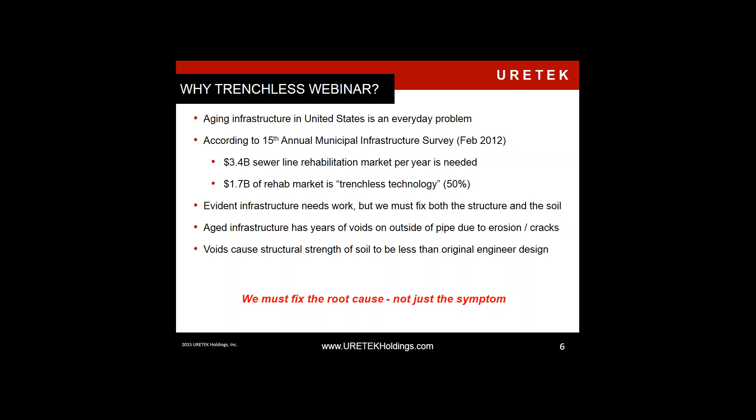So with our outside-inside series, we treat the outside of the pipe with URETEK, which is our chemical grout. On the outside, we fill the voids, displace unwanted water, and increase the bearing capacity of the soil using the chemical grout. On the inside, we are an applicator for Centripipe, a centrifugally cast concrete mortar. So you're able to get a like-new solution for your customer, or if you're the municipality, for your own assets.

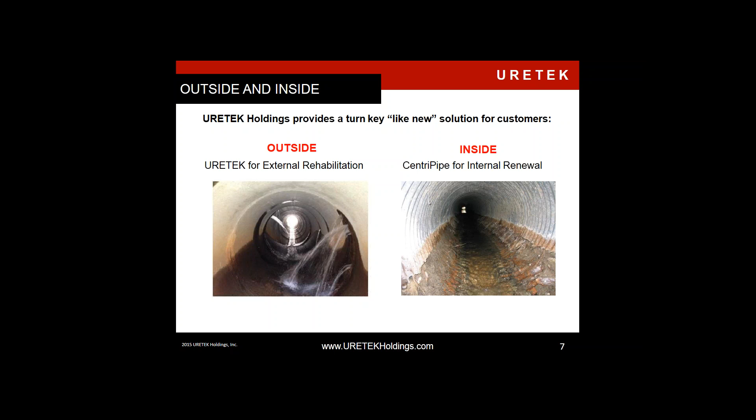And now you no longer have your original bearing capacity. So even if you just reline this only, you have an inferior soil envelope for the structure.

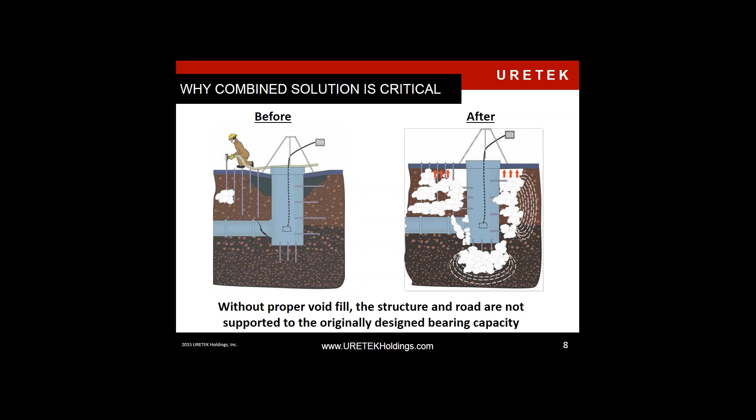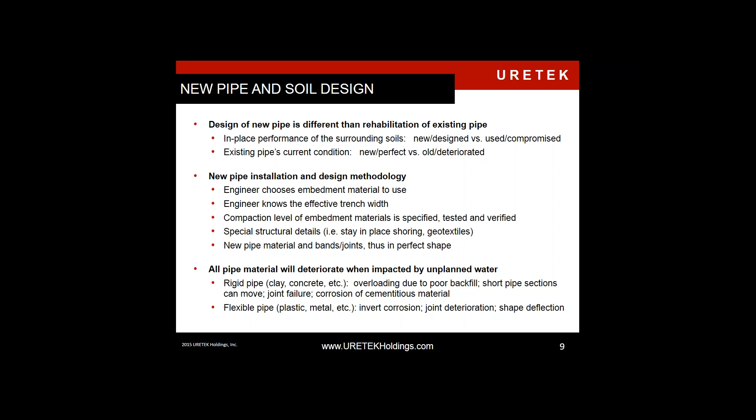Which takes us to the difference between new design and rehabilitation design. In new design, everything is perfect. You know what type of pipe you're going to be using. It's in perfect condition, the joints work, the gasket or the bell and spigot, everything lining up perfectly. From the surrounding soils, you can specify whichever type of soil you want. It is then compacted to your desired compaction level, 90% or 95%, whatever compaction level you're desiring, and all that goes into play. But what happens is there's unplanned water that starts to migrate through the system, whether it's due to poor backfill, or maybe some of the short pipe sections of RCP have started to adjust and move. You also have joint failure, no matter what type of pipe that you have.

So then that brings us to rehabilitation pipe and soil design. A lot of us are familiar with CANDE, the Culvert Analysis and Design Program, which states that you need to take into account not only the structure, but the surrounding soil envelope. They are codependent composite structures where both rely on each other. Even RCP pipe, when it is in fact designed to take a lot of the load, if the surrounding envelope is not in good shape, it will start to settle and become misaligned.

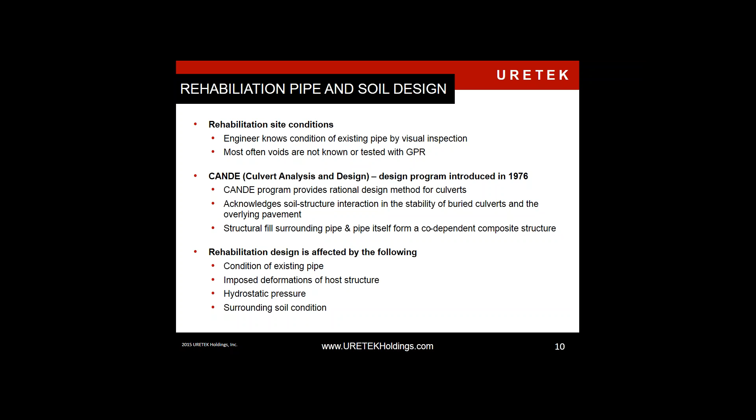So what we have found, and really what is critical to the success of rehabilitation, is to not only analyze the existing pipe, not only take into account any hydrostatic pressure, but really that surrounding soil. What is the condition? Are there voids? Are there issues that we need to address?

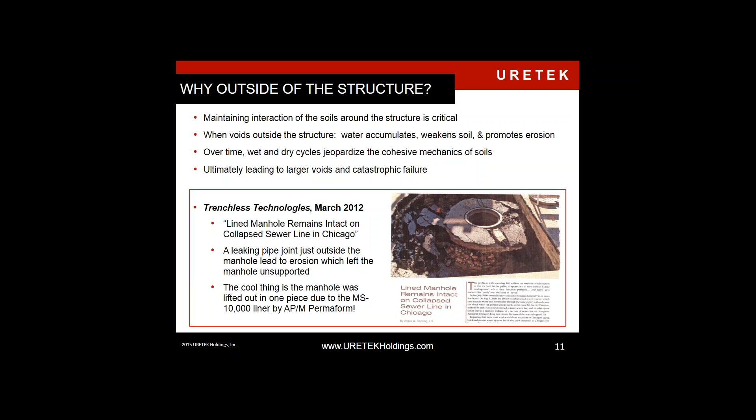This is a perfect case study of how critical the outside of the structure can be. March 2012, Trenchless Technologies had an article for a massive manhole project that took place in Chicago. You see this picture on the right. This manhole was lined with Permaform, which is one of the products that we are also an applicator for to treat manholes. But you can tell by this picture, the soil surrounding the manhole failed. That old brick manhole is standing due to that liner. So with this project, it was all about just doing reline for the structures, and the outside was neglected.

So we'll go through a couple of quick slides here of how URETEK can help with the outside, as well as Centripipe on the inside. But really the whole purpose of today's webinar is to educate you on how we detect our voids.

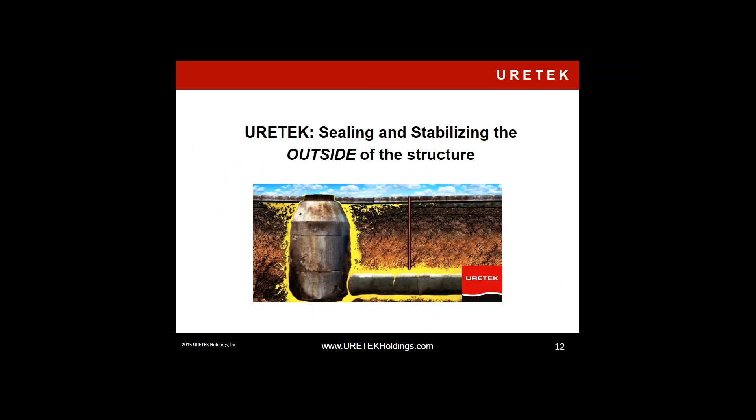So for the outside of the structure, URETEK Holdings, we utilize a chemical grout. Our chemical grout is very lightweight, but yet high strength. In the commercial industry, we use it to lift buildings, to lift footings, to improve bearing capacity. So very high strength to low weight.

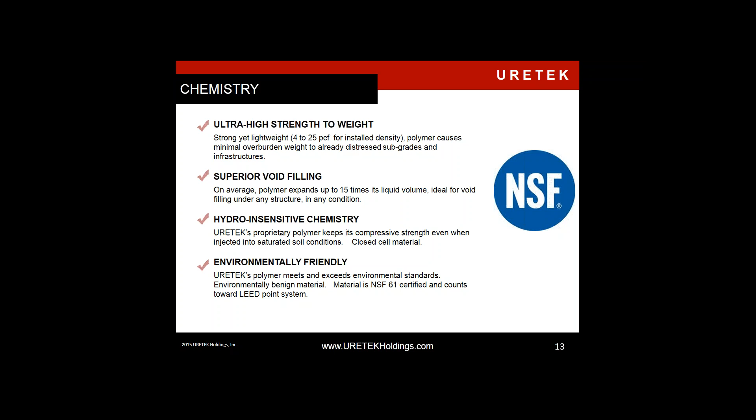One of these case studies that I always like to share is this one in Florida, where the voids around the pipe had become so bad that we needed to treat it with chemical grout. But this is a natural spring for manatee migration. So that NSF 61 rating, and that sensitivity being in blue streams for the Corps of Engineers, or being in manatee migration, comes into play.

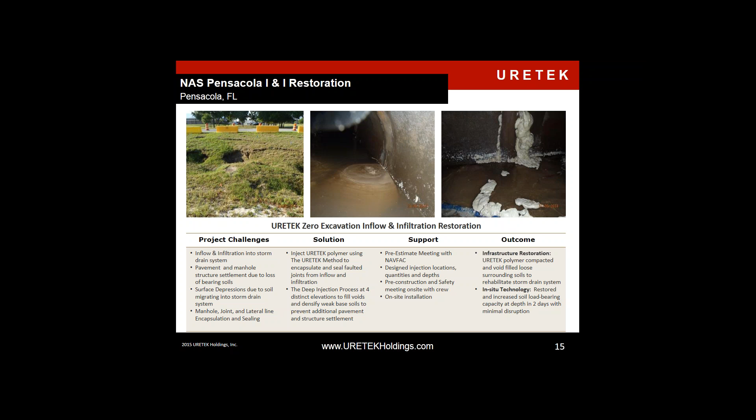The whole purpose of treating the outside of the pipe is to make sure you don't have catastrophic events take place, and then taking care of your pipe. This picture on the left shows sinkholes at the surface that were caused by I&I, inflow and infiltration. And the picture on the right shows basically what we call outcroppings, where we inject the chemical grout on the outside of the pipe. It starts to flow in, filling that joint, giving a positive seal. We then will clean up and dispose of those outcroppings.

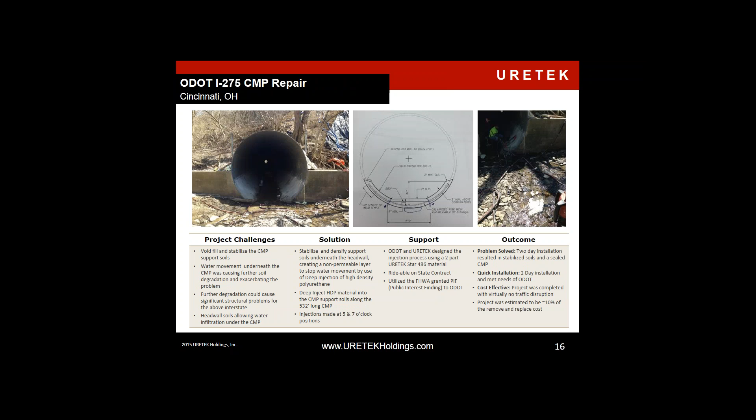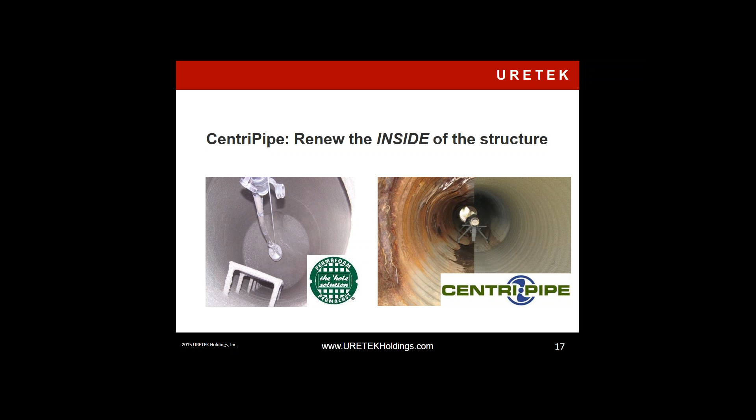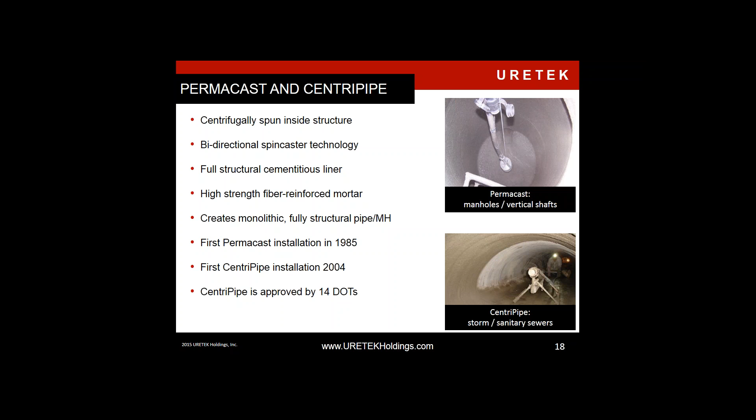Another way we treat the pipe from the inside is through CentriPipe. Permacast is for manholes, and Centripipe is the same technology, just turned horizontally to take care of the horizontal lines. This can be used in sanitary and storm sewer, and is currently approved by 14 different DOTs across the country, which is really just a function of filling out the paperwork and applying for DOT approvals.

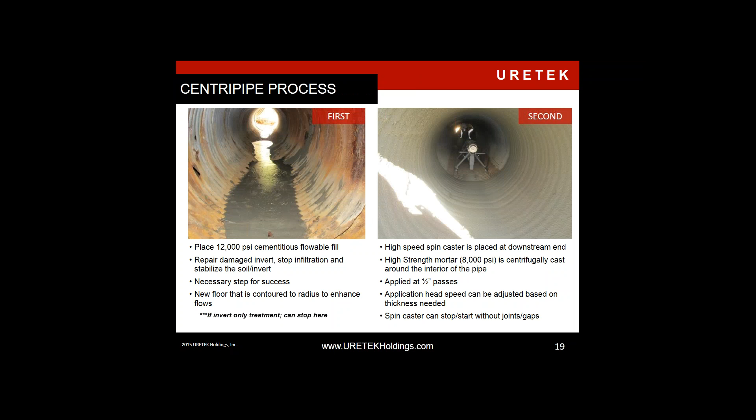Here you can see a picture on the left where that invert is deteriorated, so we'll pour 12,000 psi flowable fill to give a level surface and fill those voids. On the inside, we then spin a high-strength mortar of 8,000 psi to the desired thickness, determined based on the criteria of the site.

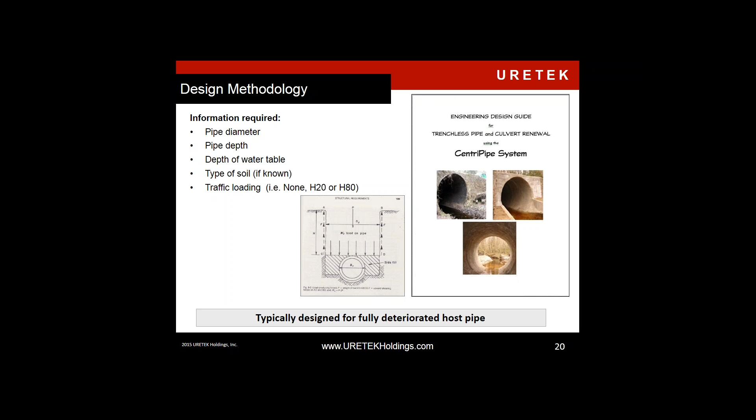What are the loads it will see? What's the depth? Where is the water table? The CentriPipe thickness is designed to stand alone. It's not dependent on the host pipe. That host pipe is really just considered to be a form for the mortar to apply to.

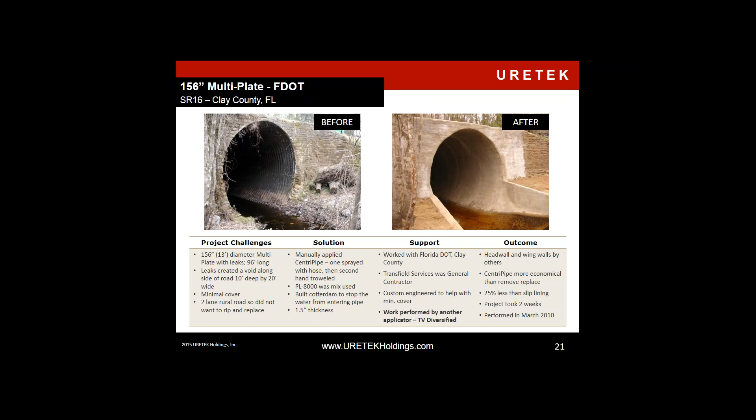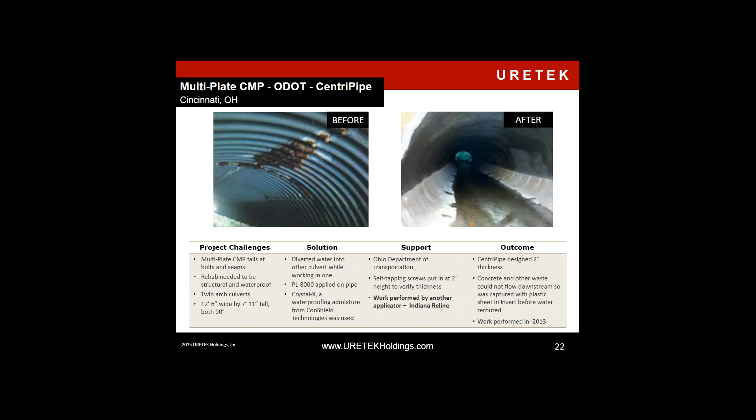Here's a couple quick project profiles. This was a job that was hand-applied using the same mortar mix. And here's another application with a DOT to help take an older pipe that was buried deep, and now you can treat the inside.

To recap, URETEK and CentriPipe fix the void in pipe after the problem has occurred. We can use the chemical grout on the outside, the CentriPipe on the inside. But what we're trying to shift is the asset management with municipalities and engineering firms to have a maintenance schedule before a problem occurs, before that sinkhole on the surface happens, before that manhole settles in the roadway, so cities can plan financially for their assets.

That's why we partnered with Inversa, because they have a first-in-class technology to detect voids on the outside of the pipe, as opposed to traditional acoustic or visual methods. They've got basically a CAT scan system that is very useful in helping. These three solutions together are definitely going to reduce life cycle cost.

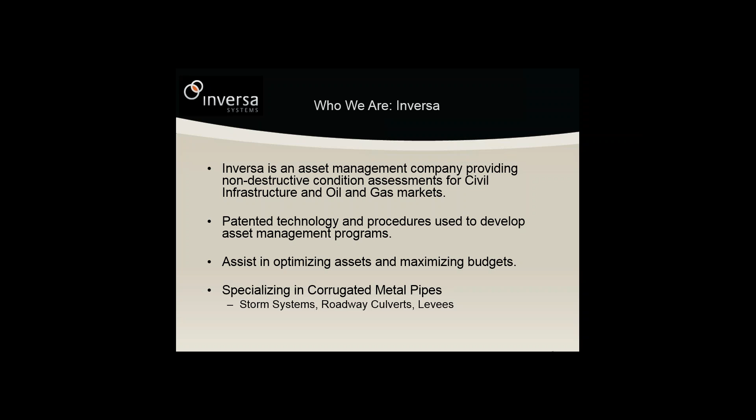Ultimately, our objective is to extend the service life of assets and maximize budgets on behalf of the asset owner, and we try to do that through a proactive asset integrity management system. We have patented technologies and procedures that help shape our asset management programs, and we specialize in corrugated metal pipe. We do have the ability for some other assets, but our specialty is really around corrugated metal pipes, storm systems, roadways, roadway culverts, and levee systems.

In terms of our organization, we have a very solid team of multi-disciplined engineers and technicians. We can support existing markets with that, but we also have a constant R&D cycle where we're trying to take this technology into developing new applications and new opportunities. We're capable of providing value-added engineering, with a diverse mixture of folks on the engineering side as well as technicians, and many times we collaborate with the engineer of record or local engineering consultants to help solve problems for the assets on behalf of the asset owner.

In terms of some of the projects we've done, we're extremely proud of the diverse mixture of clients and projects we've had the opportunity to work on, and those have really validated the value of Inversa. Now, as Corey said, we're exploring partnership opportunities to try and really penetrate the market and grow the awareness of our technology. So we're happy to be working closely with URETEK to accomplish that.

So you see a broad mixture of clients from the U.S. Army Corps of Engineers, large municipalities, small municipalities, state DOTs, private land owners have used it, as well as flood management projects. So as you can tell, we've really done a very broad and diverse mixture of projects throughout North America.

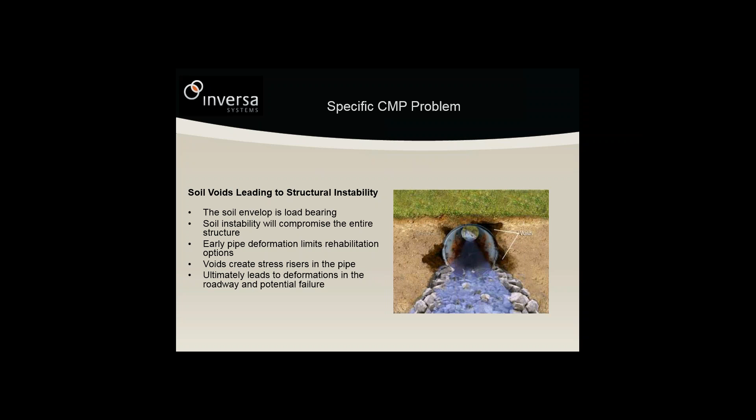One of the things we know is that more and more clients are looking to a trenchless solution to avoid disruption of infrastructure or roadway service or other problems often faced by the asset owner. So the question becomes: if we're just looking at the interior of the pipe without addressing the soil structure, are we really getting our money's worth, and are we getting the maximum potential service life extension from these assets? That's what Inversa steps in to deal with.

Current inspection methods for these types of assets are typically visual and occasionally acoustic or knock testing. These are both good screening tools. Inversa uses them, but with visual inspection, what you can tell are visual cues like corrosion, joint failure, misalignment, deformation, things like that, that can be easily documented. But you can't go beyond what you can see.

Some people do acoustic testing, or knock testing, which is banging on the pipe to try to identify regions of the pipe wall which sound different from the rest. This is a good screening tool, but what we know from years of experience is that it's subjective and subject to a lot of false positives. Very, very small anomalies can make a pipe wall sound hollow. So although it's a good screening tool, neither visual nor acoustic testing are conclusive as far as structural integrity in flexible conduits are concerned.

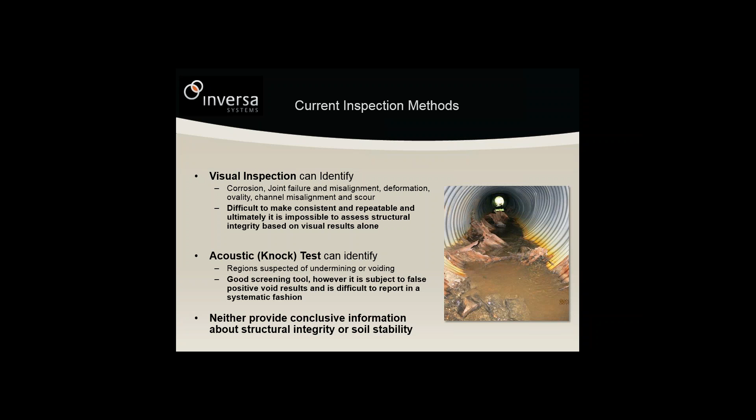Inversa has developed several technologies. Our lead technology is our Insight system, which is the first CAT scan for infrastructure. Many people are familiar with a CAT scan in a hospital environment, which, if you can imagine, is a large donut with a human body slid into the hole.

Inside that donut is a gantry, and on one side is a radiation source, with a detector directly opposing it. The radiation beam is shot through the human, and the gantry rotates around to create a relative map of density and a cross-section view. Inversa's innovation was being able to do this from one side, so we're no longer limited by the size of the hole in the donut for the objects we can examine. This is the first time CT scan technology has been taken out into an industrial environment.

What you can see there is the scanner gantried against a piece of pipe, and you can see the image. The dark wavy line at the bottom is, of course, the steel corrugated pipe wall, and behind that is a void area, and further into the image is the surrounding backing material.

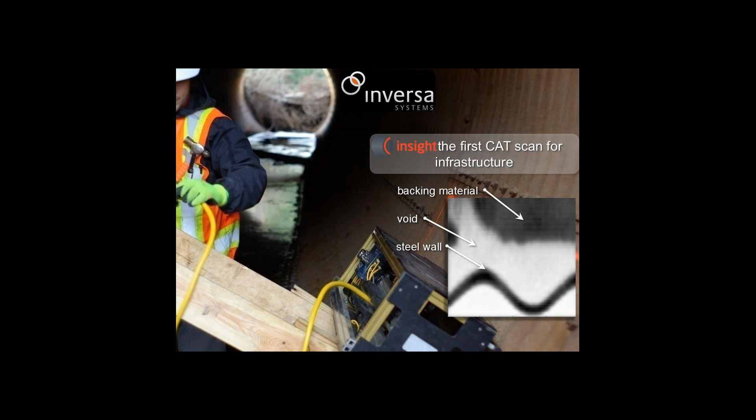Inversa's innovation for the application of this type of tool is a three-part condition assessment. What we try to do is look at best practices in the industry when it came to our visual inspection, and we developed a very robust, highly repeatable visual inspection protocol. For us, it is software driven, so the idea is ultimately we can have a very consistent rating between various inspectors in various conditions.

Ultimately, what we feel is that a well-done, highly repeatable visual inspection is an excellent piece of information. When done consistently and in a repeatable fashion, even that information can be compared to subsequent inspections, and you can begin to trend deterioration of an asset.

We went a little further and built a very robust protocol around acoustic inspection, where we test almost the entire interior of a pipe for acoustic anomalies. What we know from our experience with acoustic testing is that when we bang on a pipe and it sounds solid, about 99.6% of the time it is. When it doesn't sound solid, all we can say is it's different from the rest of the pipe, and we don't know what's going on there.

So what we do then is we locate these areas, suspect regions or anomalous areas, and we create a pipe map, so they can be located. These acoustic anomalies, if they're large enough and in consistent patterns, depending on the risk threshold of the asset owner, they will be selected for CT imaging.

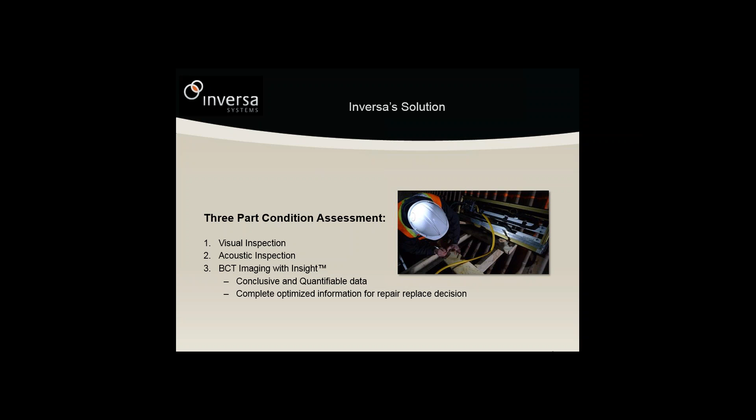So what we do is, like I said, Inversa's approach to this is to do a visual assessment, and it's a software-driven approach. The idea is that we very typically begin with the road surface, guardrail, embankment, head walls if they're there.

Then we look at stream alignment, scour. Then we go down the pipe barrel and we look for alignment issues, failing joints, corrosion, tipped or missing bolts, through wall corrosion, invert deterioration, and other things that can be assessed visually. These are all force ranked in a 1 to 5 system.

With that, we can begin to, a pipe that looks good can be tabulated. A report can be created based on the visual assessment, and if there is no need to further inspect, that can be fine, because we can do a large amount of pipes for an asset owner visually.

Then if there is reason or suspect reason, we very typically do an acoustic assessment of the entire inside of the pipe. With that, we then create a next phase of reporting where we create a pipe wall map. We look at the location and size of these anomalies, and if they are of concern, then they can be further investigated.

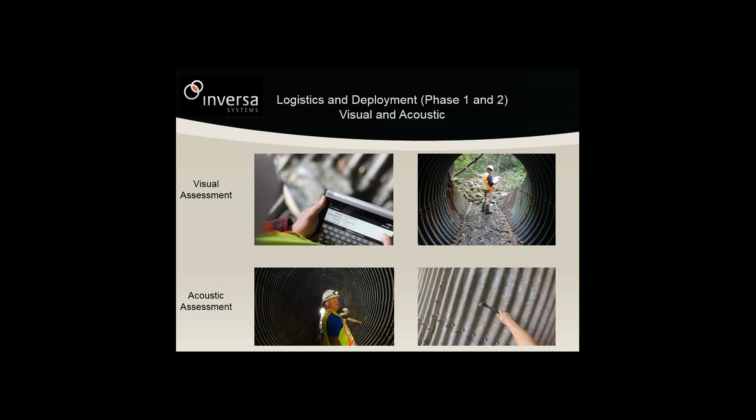Finally, we end up with the deployment of the CT imaging system, the Insight system. When we have acoustic anomalies that have been located and are in suspect regions or are of concern to the asset owner, they will be imaged.

Then the radiation source is deployed into the scanner, and the scanner is operated from a laptop remotely. So while the scanner is operating, we are not in the pipe with it. We're outside the pipe using a laptop to control it, and there is an image created in real time as the scanner is operating. Very typically for culverts, it takes about 8 minutes to create an image, and the image is very typically 10 inches wide and 10 to 12 inches deep.

As I said, when we begin to pull all this data together, one of the things our software does is it creates a map of the pipe wall, a representation of the pipe wall which has dimensional information. As you can see, there are small dots on it typically labeled V and a number for visual anomalies or visual cues. Then there are large dark squares, which are acoustic anomalies. And if there was a BCT image taken, it will be within the acoustic anomaly, so you see the red dots marked BCT where the images were taken.

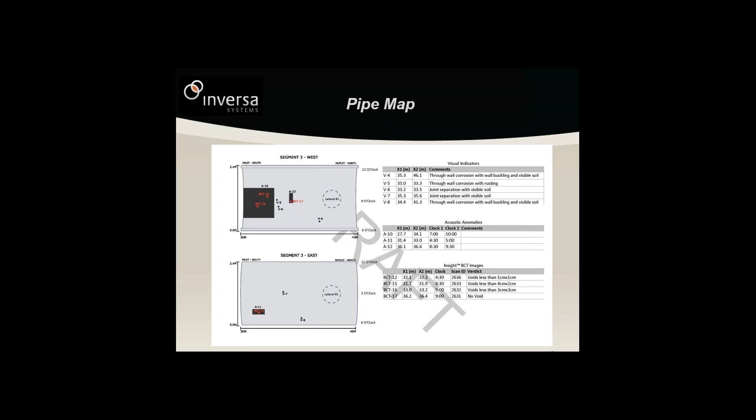So a lot of information can be gathered from the pipe map.

Very often when we're dealing, especially in roadway culverts, it's more difficult to do with stormwater systems. We provide a pipe profile plan, which gives you the burial depth, the geometry of the embankment. If possible, we survey inside the pipe to give you both vertical and horizontal alignment, and show any inconsistencies like sagging in the pipe. So this also is another piece of information that can be very valuable to the owner in assessing what needs to be done with a project.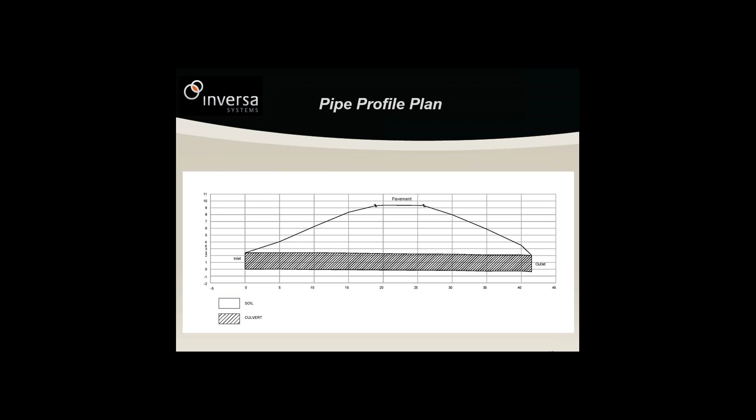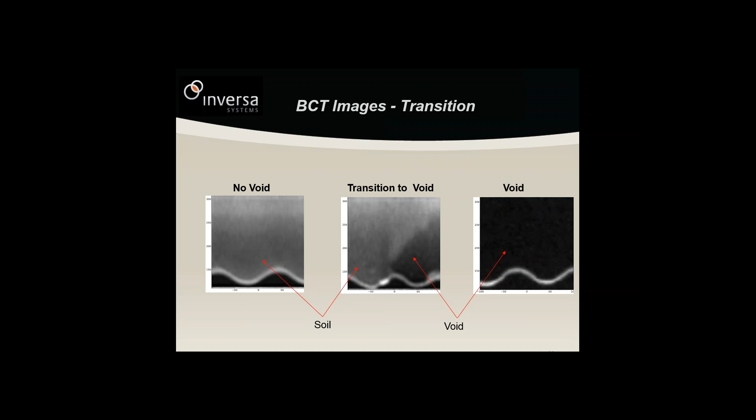One of the things we often say, and it's something we discovered over time ourselves by dealing with some of the engineers we deal with, is that the geometry of the void is often very telling as well. With a little bit of experience, we've realized that soft, sandy type soils tend to fail in a very straight shear wall behind the pipe when there's a void present.

And in fact, there was a smaller diameter, 24-inch I think, concrete pipe that had a failed joint. The water was running through that failed joint, flowing down through a little bit of a weak spot in the soil, hitting the culvert pipe, and ultimately causing a void behind it. This is the start of that void.

That void turned out to be many meters long and many meters high, so it was a very substantial segment of the wall of that pipe that was totally unsupported and under 6 lanes of traffic with about 20 feet of cover.

That pipe has since been rehabilitated. The annular space was grouted. The pipe itself was in pretty good shape. We understand from the owner that it was a $7 to $10 million excavation, but it was easily accomplished in a very short period of time. I think the contract was let for about $900,000.

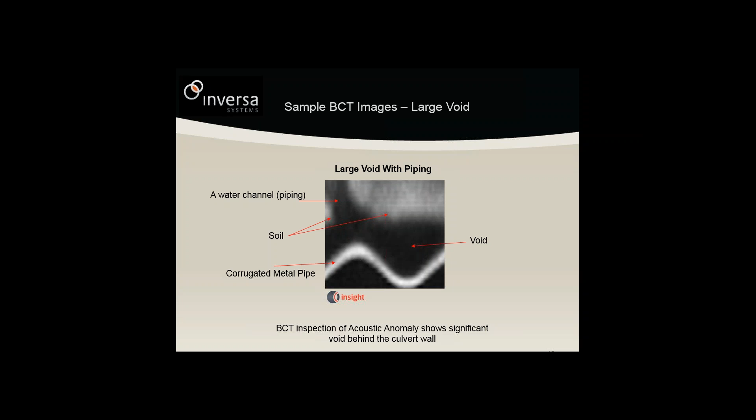So what we can say is Inversa System—basically what our goal is to conduct conclusive structural analysis of assets and prioritize critical assets. In other words, begin working with the asset owner to develop a good management strategy.

Very often we'll look at large numbers of pipes in visual and acoustic testing only. Then we will sit down, consult with the asset owner and say, of these assets we looked at, here are the few that are of highest concern. How much budget do you have to deal with it? Because often in the real world there are very, very hard budget limits. And they'll say, well, we have enough to deal with 3 pipes out of the 10 you looked at. So which are the worst 3? That's what we mean by prioritizing critical assets.

In other words, looking at the 3 at highest risk and allowing the owner to develop a rehabilitation program that addresses the assets they can afford to deal with at this time. A good visual and acoustic program can allow you to start to detail baseline information on these assets. You can begin to compare subsequent inspections if they're done in a highly repeatable, robust fashion. Then you're beginning to look at monitoring these assets and even trending the deterioration over time so that you know when an intervention is best done. And of course, when this is done well, this increases safety to the asset owner, safety to the users of the utility if there's a road above it or any other infrastructure.

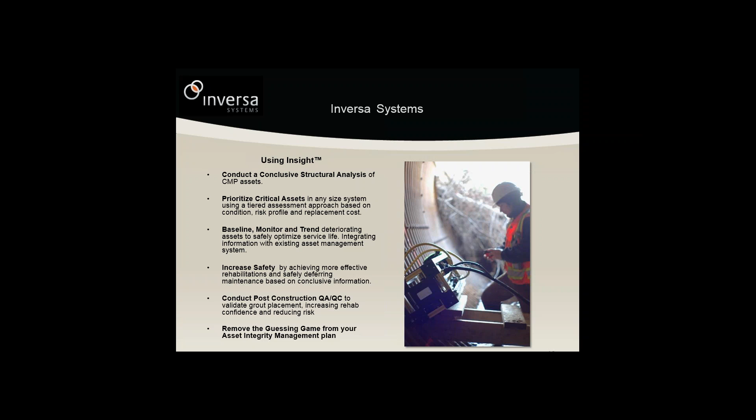Here I'll go through a couple of brief case studies. This is a recent one in Quebec, Canada, where we were dealing with a large diameter length of corrugated metal pipe that was a shared asset. In other words, part of the pipe was under municipal assets, the other part was under a provincial highway, a 4-lane arterial highway into Quebec City.

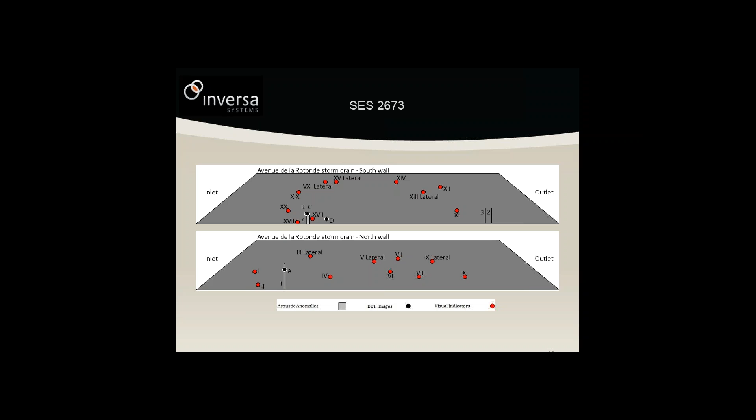This is an older version of our pipe representation, but if you look on it, you can see where there were visual anomalies, where there are small squares, where there were acoustic anomalies down in the haunches of the pipe, and then ultimately the black dots where there were BCT images taken of it. So we began to look at this. The concern was there was some severe deformation of the pipe, but it was highly localized. In other words, of the 180 meters of this pipe, there was really only about 4 meters that were really of key concern structurally. So we did a robust test.

We did visual acoustic testing completely, and we did BCT imaging where it was needed. What we did is we were able to locate 4 acoustic anomalies, 2 of which I believe were void areas, which were easily remediated, and we were able to help the owner develop a program to rehabilitate this pipe, which included some chemical grout applications in key locations in order to stabilize the soil around the pipe, 1 structural repair—which in this case included a tunnel plate type structure inside the pipe—and then a corrosion-resistant coating.

With all of these things handled, the client went from dealing with about a $5 million project down to dealing with a $500,000 project that would address only the parts of the pipe that were failing, and really deal with only the segments of soil supporting the pipe that needed to be stabilized. And then again, add a corrosion coating, which allows the useful service life of this asset to be extended greatly, and also a structural repair in 1 very specific location to deal with that type of failure mode.

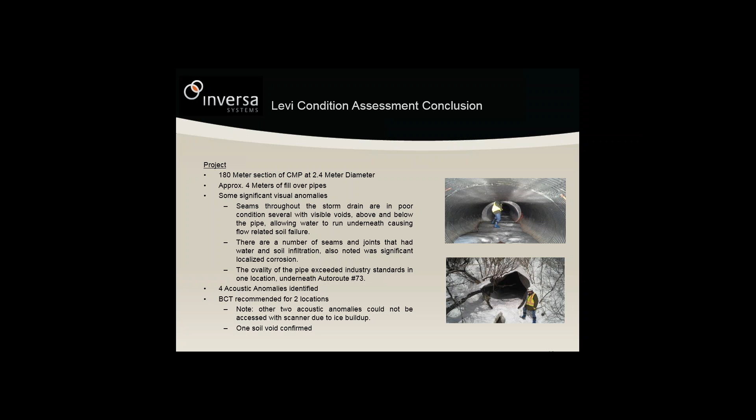Like I said, we developed on the outfall part of this pipe from 156 meters to 180 meters. It was on a very severe downslope.

That segment of the pipe actually wasn't able to be rehabilitated, but what we were able to do with the client, since the outfall was in such an advanced state of disrepair, is we were able to make recommendations on a monitoring program. In other words, we were able to say, here's the features you need to measure. You need to measure them every 3 months. Here's your survey measurements you need to take, the location of the pipe. If it shifts from that, then this is a very high concern.

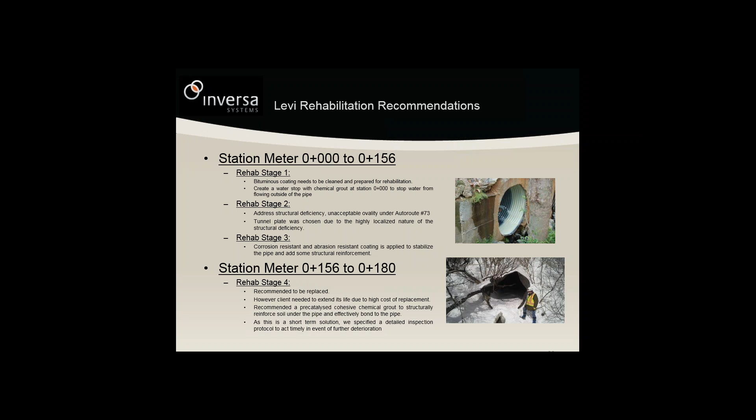So not only did we help the client locate the problem and point them in the direction to rehabilitate it, fixing the part of the pipe that can be easily and safely fixed to extend service life, but even on the segments of pipe, the outfall in this case, that weren't easily fixed, we were able to recommend a monitoring strategy so that they'll know exactly when they do have to intervene.

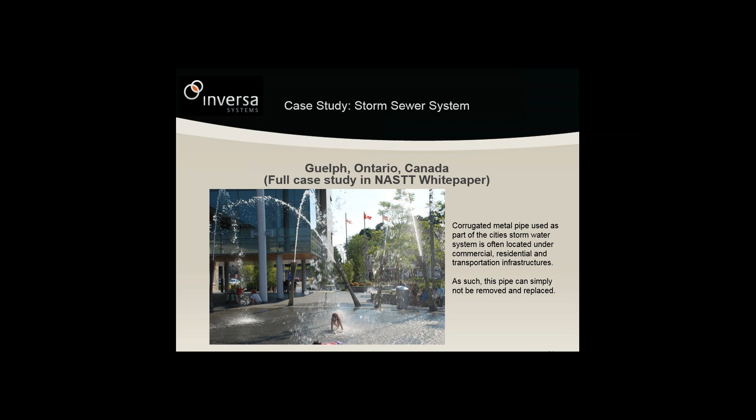Another case study is the City of Guelph in Ontario, Canada, where we dealt with a large stormwater project. Some of this pipe was under municipal infrastructure, in dense residential neighborhoods. Some of it was shared assets on a provincial arterial highway into the city. We looked at 17 segments of pipe in this project, and of those, I believe there were 4 segments that were of concern.

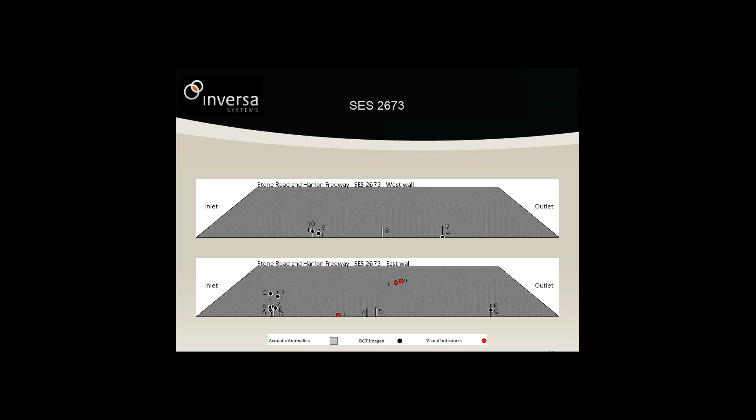So what we were able to do again is go into a visual and acoustic inspection, locate the areas of high concern. Acoustic anomalies were mapped and quantified, and ultimately BCT scanning was done in order to ensure that the voids that weren't supporting the pipe were located and could be filled.

And this is exactly what the owner wanted to do. They wanted to extend the service life of this pipe for minimal cost, so they wanted to point their rehabilitation budget exactly where it needed to be.

So we were able to look at this and say, for now at least, with an ongoing inspection program, you have good baseline data. There are really only 4 segments of the 17 segments of this pipe that needed to be dealt with immediately. The other ones, maintenance can be deferred and monitored. You have good baseline data, and if you see any changes in the data you're collecting in subsequent inspections, let us know, and we're happy to go back.

We can go in with the BCT equipment and see if these voids are getting larger or if new ones are forming, and so forth and so on.

But you'll look at some of the images from one segment of pipe there, and what you'll notice is a lot of them have voids, some of them don't, some of them have very small voids. But one thing I'll tell you is that all of these suspect areas sounded equally hollow. In other words, it's a very good example of how acoustic hammer testing is an excellent screening tool, but not conclusive.

And what you can see is different geometry in the voids forming behind the pipe wall. Some of them are very straight, which is the soil wall, very indicative of softer sandy silt type soils. And some of them are more jagged, which usually means there are granular materials in it.

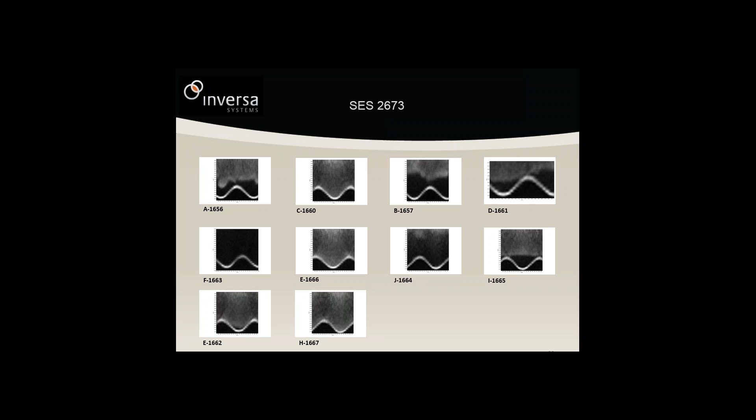So like I said, 17 sections of pipe, there were really only 4 that needed to be addressed. There were 44 acoustic anomalies, and of that, 31 were imaged.

In other words, it's a great example of looking at a large system for the owner, identifying the areas of key concern that need to be dealt with quickly, and addressing those with the information you need in order to rehabilitate them. In this case, it was anti-corrosion coatings or semi-structural type solutions, but the key thing is those pipes needed to be well supported, and the voids that were located could be grouted, filled, and stabilized, which goes a long way in overall stability of this pipe system.

So this is a great example of a large system where we looked at the whole system with visual and acoustic screening, determined where we needed to do BCT imaging, took the BCT imaging, and with that total 3 tiers of inspection, we were able to focus the owner's dollars only where they needed to spend them.

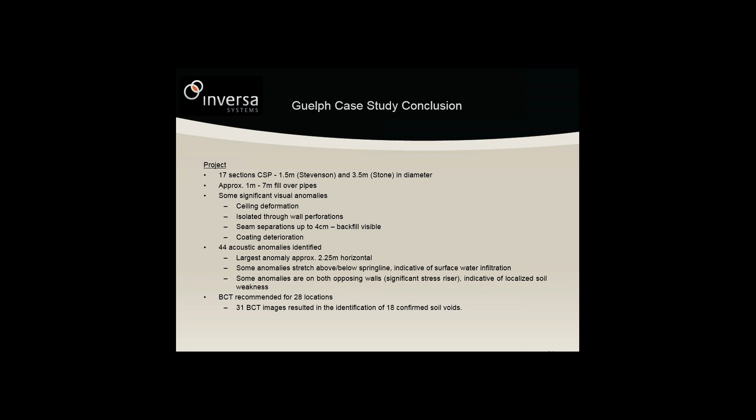An interesting one we did was some work in Louisville, Kentucky with the Army Corps of Engineers. We were looking at some gate structures, in other words, pipes that travel underneath the levee from both the river side to the inland side. These pipes have a gate structure, or a big check valve in effect. In storm events, the valve can be closed to prevent river water from coming inland. In normal weather conditions, the valves are open and rainwater can flow out to the river.

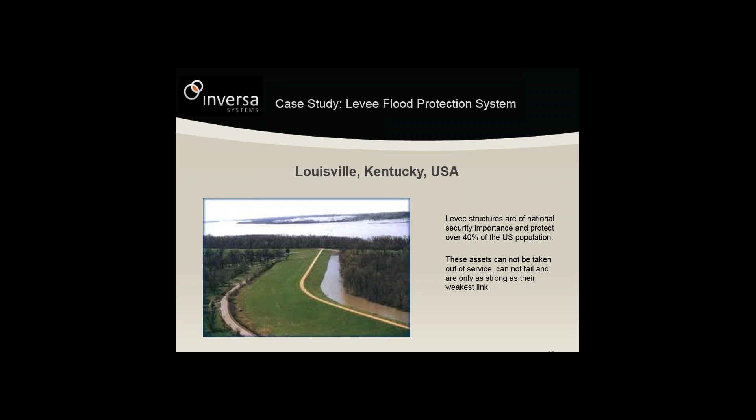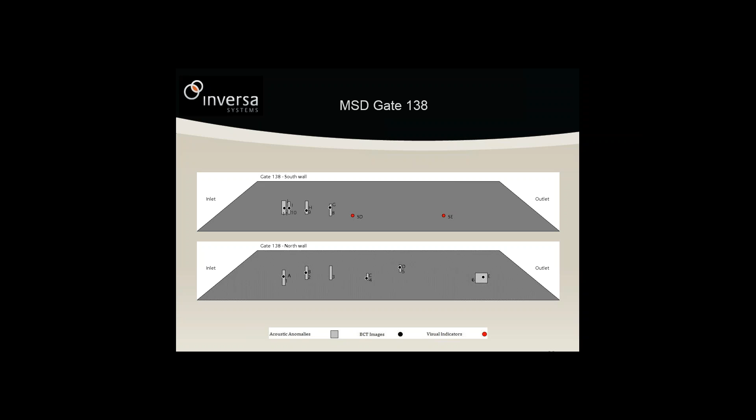What we found is some pretty interesting and consistent flaws in these pipes, where we were seeing acoustic anomalies at the spring line extending both above and below it, which is not typical. So we did some BCT imaging on these to try to figure out what was going on with these pipes.

What you'll see here is some of the imagery we took, where you can see the pipe wall, and you can also see in the soil an imprint of the pipe, which was not unique, because at the time these levees were built, the Army Corps felt that high clay content soils were very stable in wet storm conditions, and it was a good material to build levees with.

What we found when we looked at this is that seasonally the moisture level in the clay goes up and down. When it goes down, the clay contracts off the pipe a little bit, so seeing an imprint of the pipe is somewhat expected. What we didn't expect is seeing the imprint of the pipe and the pipe not lining up.

What was happening here is, as it turned out, there was heavy corrosion in the invert of this section of the pipe, and it had buckled in on itself on the bottom. The clay was pushing it from the sides, and when the clay retracted, it pulled away from the pipe, left a space, and there was enough space in this case that the pipe was actually traveling downslope through the levee. So this is a really interesting example of how the geometry of a void can often lead to understanding the root cause of the failure.

And when we understand the root cause, then we can develop an engineered solution. In this case, the Army Corps very typically likes to use cellular cementitious grout. Here, I think they worked with a bentonite slurry that more accurately simulated the conditions of the native soil, so that it would act more like that in the long term. They were able to fill the void behind these pipes with that type of material, and then they were able to go in and do a structural repair on the pipe.

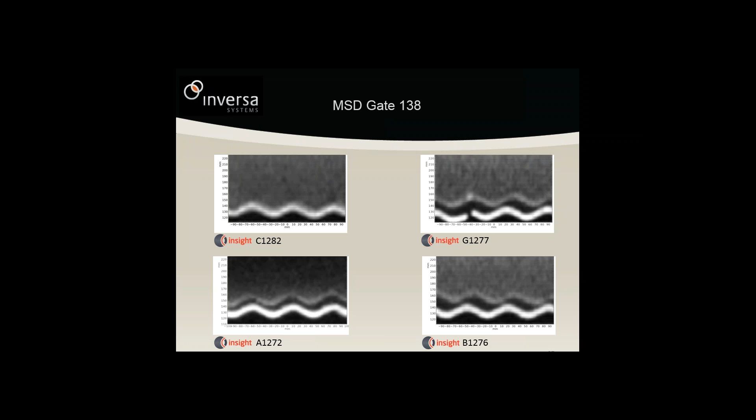What the Army Corps was trying to do is understand if their grouting protocols were yielding the type of results they expected. In this case, looking at several of these lined pipes, we found a consistent flaw where on the inlet side at 12 o'clock there was a void, and on the outlet side at 6 o'clock there was a void.

What was going on is that several liners were being grouted in the same day, and they weren't allowing proper settlement time for the grout they were pouring in to seep through any inconsistencies in the invert of the host pipe and other things like that. So it was neither a failure of the materials, the technique, nor the contractor. It just was an incomplete understanding of what's required to fill these voids.

What they've subsequently done is now they will often grout multiple pipes a day, but they'll also insist that within a 24-hour time limit, a second tier of grout will then be installed after the first tier has had time to settle into place.

So, an interesting look into a failure mode that they suspected was going on, but really had no way to fully understand. Taking a little bit of information, they were able to tweak their technique to get a much more consistent, better result, which they're much, much happier with.

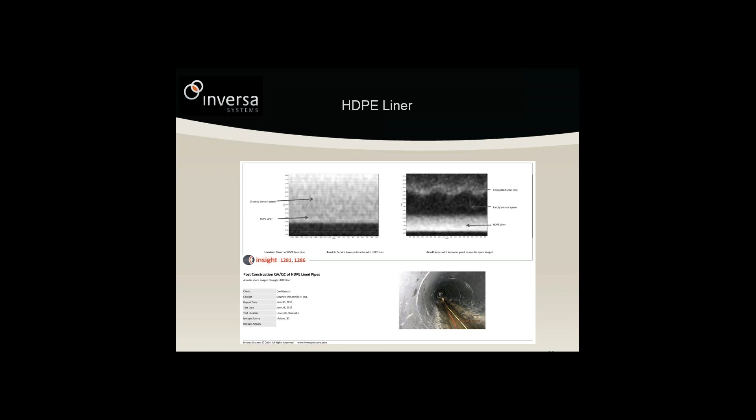So this was the Louisville levee program with the Army Corps, and ultimately at the end of this, the Army Corps of Engineers has decided that Inversa's Insight system is a commercially viable product for locating voids through CMP pipes.

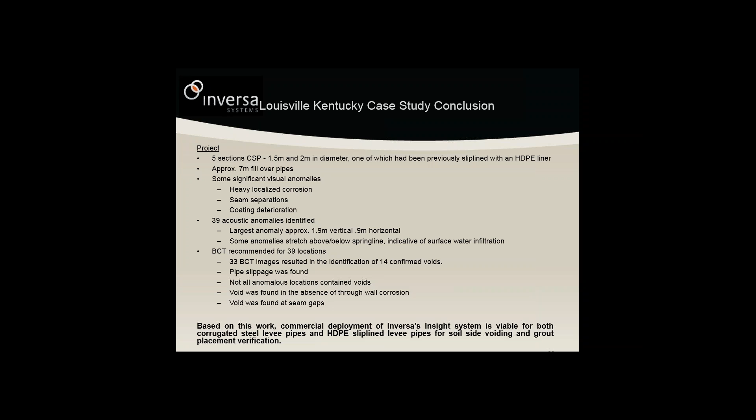So I guess in conclusion, what we can say is visual and acoustic mapping alone are excellent screening tools, but they're not enough to put together a well-thought-out, well-engineered rehabilitation program for a pipe.

Current inspection methods can both under and overestimate a culvert condition. Conducting a full structural condition assessment gives the highest possible degree of confidence for either the continued operation of the pipe, monitoring, or for developing a rehabilitation plan to get the best possible outcomes for the asset owner.

In other words, our BCT equipment, when used in conjunction with a good asset management integrity approach, allows you to avoid costly replacements. You can detect nonconformances early. More importantly, trend deterioration, so you're repairing only when necessary and to maximize safety.

You can quantify necessary repairs. You're not only looking at voids, it's possible to estimate the volume of the void.

This allows you to increase safety, reduce maintenance costs, and repair voids prior to trenchless rehabilitation, which is something that's often overlooked in a lot of rehabilitation strategies. We think it's vitally important because you can ultimately spend a lot of money to repair an asset and still have the soil fail around it.

Just like we saw earlier in the URETEK picture, where you could see the soil fail around a manhole and the manhole standing perfectly intact. So this is really what we're trying to avoid.

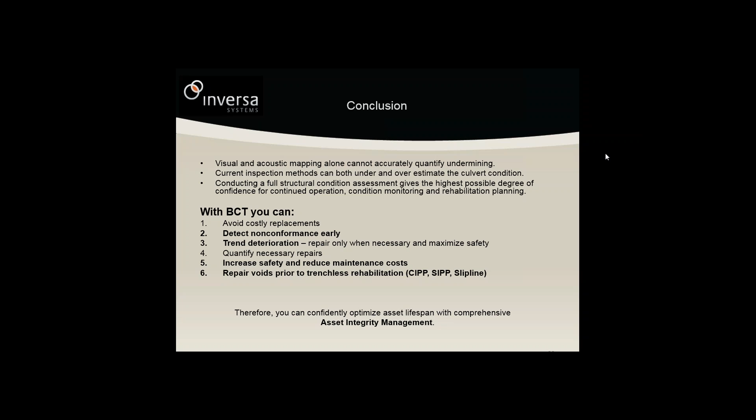So first of all, what other pipe materials other than CMP, and how small of a diameter can be scanned using the BCT? We've focused our shot at the market on really a currently unmet inspection need. BCT equipment is very well suited to corrugated metal, plastics, thin composites, and probably up to about a half inch steel pipes to look through.

Concrete, we're often asked about, is very, very difficult to deal with from a radiation standpoint. The intensity and type of radiation required would create a very, very large exclusion zone, so it wouldn't be practical to deploy in the field. The type of radiation we use is very commonly available isotopes, and they're very often used in weld inspection radiography for, say, gas pipelines, things like that.

And when we're underground, the shielding the ground provides is excellent. In other words, we can walk out of the end of the pipe, walk to the side, and we're very, very safe. So again, I guess the recap is corrugated metal can't be done with GPR or other technologies. Plastic pipe is excellent, or previously lined pipes where you have composite type structures where they've been lined, sprayed, coated, CIPP, things like that. So those are all possible to do.

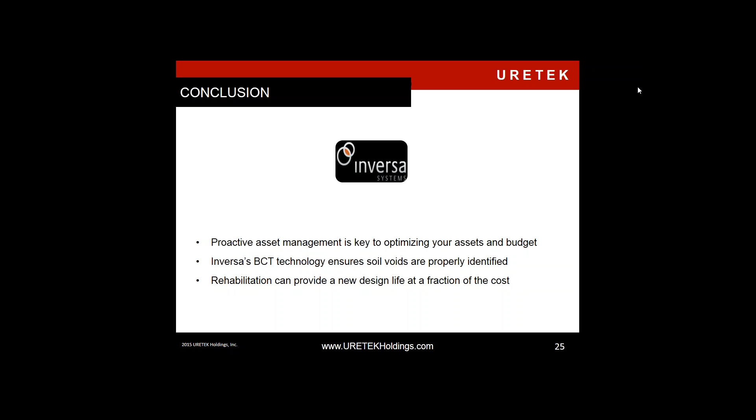We are doing monthly webinars, and our next webinar will be on November 13th. We are partnering with University of Wisconsin - they have put together a report. Right now it has only been done in the lab, and pretty soon they'll be doing field testing.

The thesis of the test is that injecting chemical grout into existing rail ballast - the aggregate underneath the rail - actually performs better than brand new ballast. Very rarely do you have a rehabilitation effort that is less expensive and performs better than brand new. But what's happening in the lab test at University of Wisconsin College of Engineering is it is in fact proving to be true that the existing rehabilitated solution is performing better.